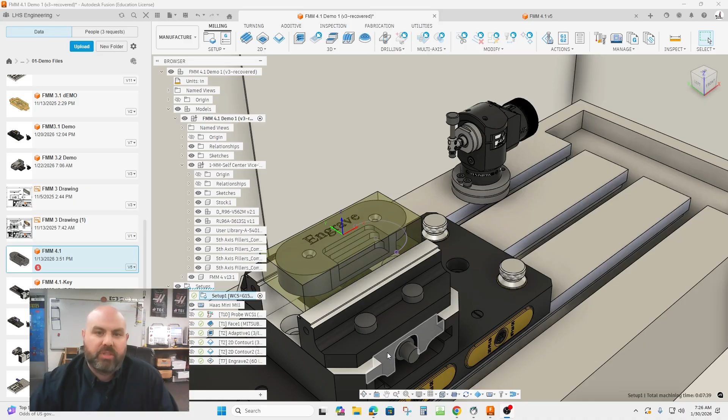Howdy. Today we're going to cover Fusion Manufacturing Milling number 4. It's this setup right here. A couple of key topics we're going to talk about is engraving, how we deal with this undercut by creating a sketch, and 3D adaptive clearing. So stick around, it's going to be superb.

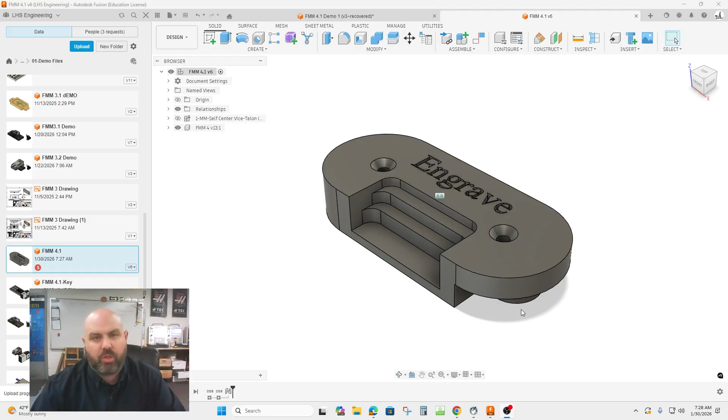Here's the part we're working with today. The couple of key features is it has this stair step, which lends us well to 3D adaptive, and we have this undercut. So we're going to learn how to basically create a sketch that we can use in manufacturing to control the cutter. Before we can do the manufacturing, we first need to address we have this undercut.

Eventually in the manufacturing process, we're going to do a finish contour. And the best option would be to finish contour around the bottom of the part here, all the way around, including this area here, that there is no line to follow. So we're going to go ahead and put that line in, so when we get to the manufacturing process, we can machine this perfectly.

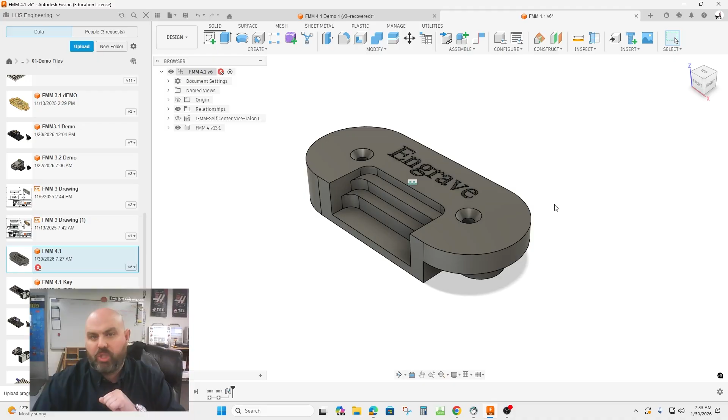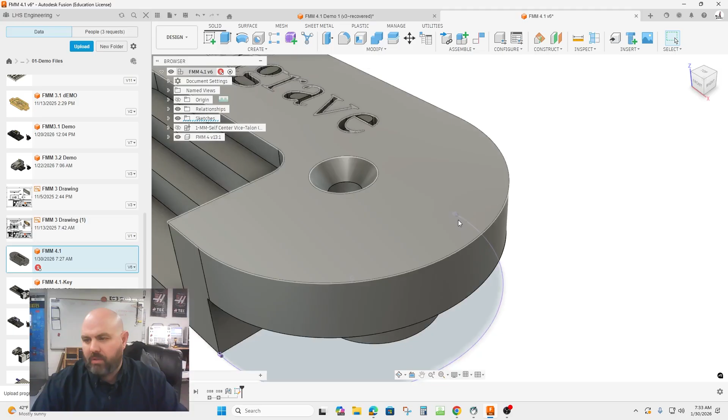So we're going to start a sketch on the bottom of this part. On the keyboard, P for project, we're going to click on this arc, and we're going to click on the little line here, and then there's one on the other side here, and we'll go ahead and click OK. Then we can flip this back over, hit Finish Sketch, and zoom out. That gives us this purple line here that we can use on our finished contour when we get to manufacturing.

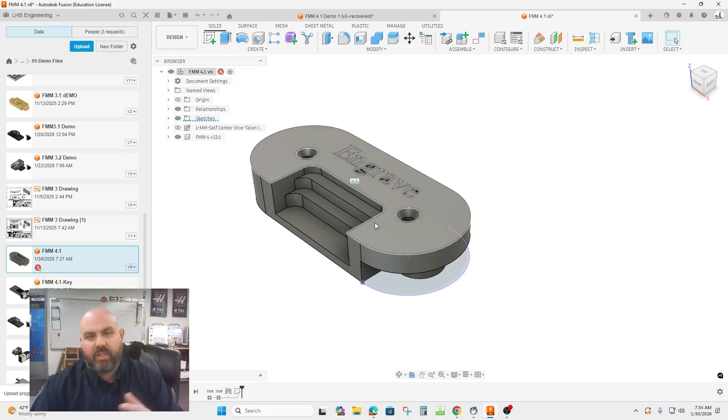Now that we've set the part up where we want it, we can go ahead and create our file where we have our work holding and the part loaded. We're going to use our setup sheets, which I have in the classroom, or you can download, that is going to walk you through the work holding, how big the stock is, what tools we're going to need, and the work offset. So go ahead and get that done and then come back to this video where I'm going to show you the new elements.

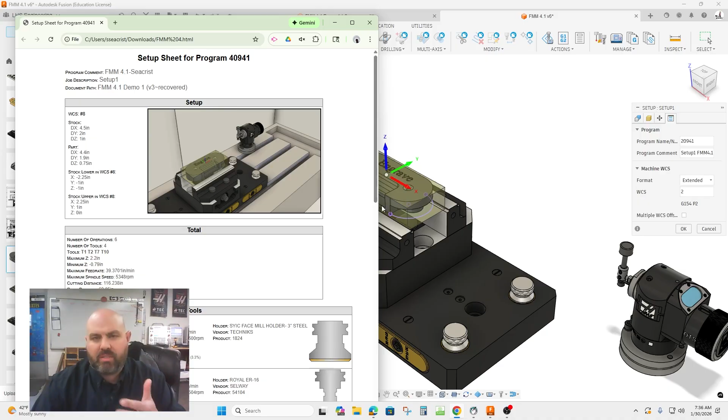And then the file name or the file number right here, and the name is this. Obviously you're going to use your last name. The rest of the setup tells you where the origin is, which you should know how to do from previous videos. So we're going to go ahead and move on that. First thing we're going to do, first 2 steps, are we're going to probe it and we're going to face it. So go ahead and do that and then come on back to the video.

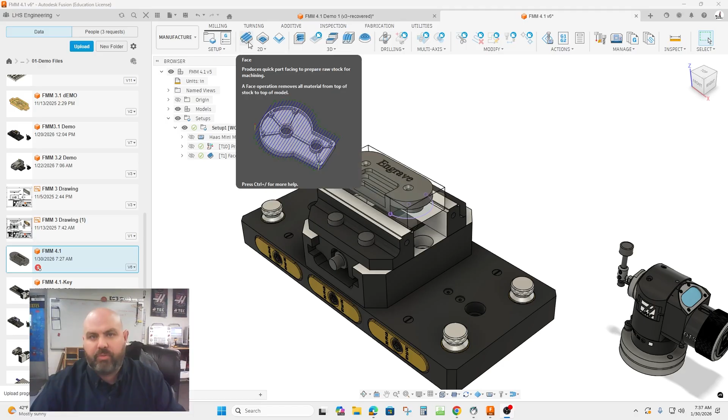Okay, welcome back. We have probing done and facing done. So now we are going to want to remove most of the material using adaptive. In the previous videos, I showed you how to use 2D adaptive, which would have some limited success on this part. Would we get the basic shape? Yes, but this stair step in here would require a 2D adaptive for each step.

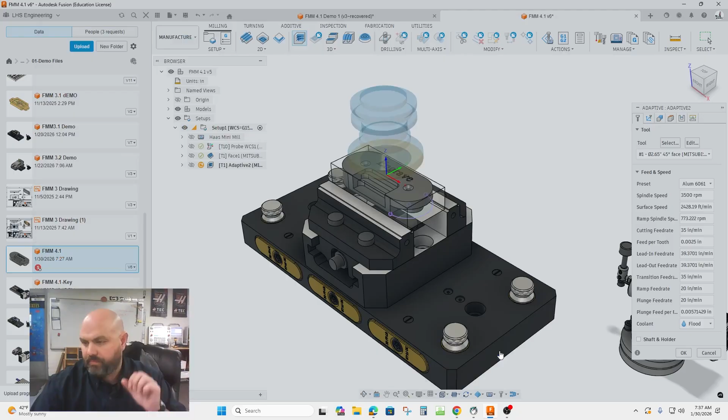So the better way is to actually use 3D adaptive. This will pick out all of the things. We're going to go ahead and select our tool, which should be our 3/8 end mill in aluminum. Then we're going to come across and it's going to pick up that we're cutting this, looking at any previous machining. Essentially all we have to do is check the optimal load—this is a little bit aggressive for a high school classroom, probably fine in production, but I am going to reduce it down a little bit so that we're a little bit easier on the machine, especially if you make a mistake. And then we're going to go ahead and click OK.

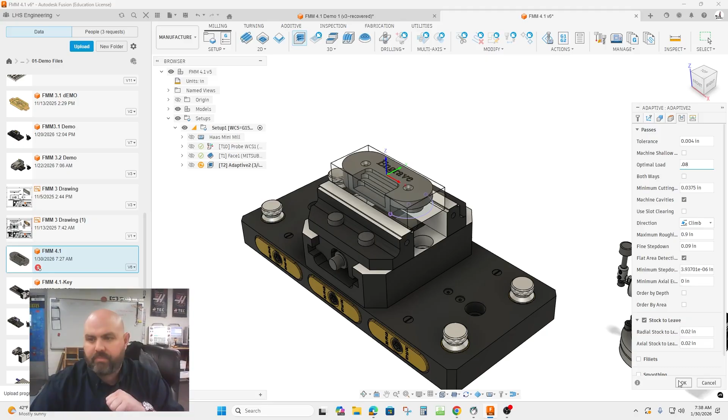What this is going to do is it's going to look at the part, and you're going to see that it is going to cut everything in one pass. So you can see that it's gone in here and removed all this stair step and roughed out the entire part.

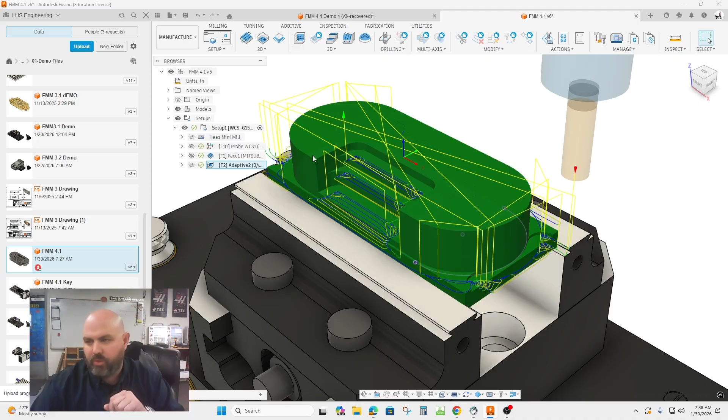The only thing I didn't do that I should have done is I normally like to push the part. Let's go in and turn off the model really quickly, or the stock really quickly, right here. We needed that turned on, by the way, for probing, if you wonder why it's on. But if you look here, here is the bottom of the part.

Well, this isn't a good side because this is the side without the thing. But if we grab here, the bottom of the part lines up with the bottom of this, and I don't want to do that.

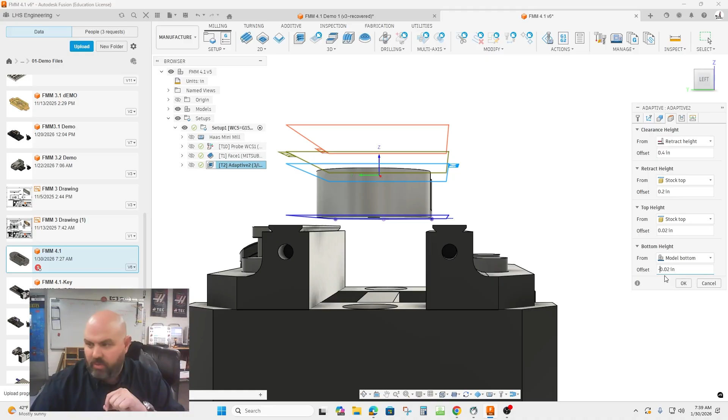So I'm going to come back in here and push the bottom. We're going to offset it the opposite of what they did, negative 0.02. If you look at the blue thing, you can see that blue line makes it a little bit below it. That makes sure when we flip it, we have a better finished part. I'm going to go ahead and click OK. It's going to do some more thinking, and it should take off to that level.

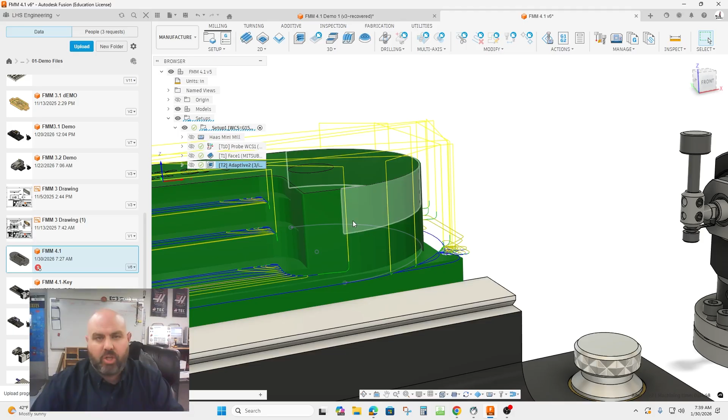So now that we've got most of the material removed from the part, our last step is to go in and finish it. As you can see here, there's a little bit of material left, so we're going to have a series of contours.

I'm going to go ahead and select contour. I'm using the same cutter, and I'm going to pick that purple line that I drew, and then this one, and that one, and that one. We are going to go ahead and click OK.

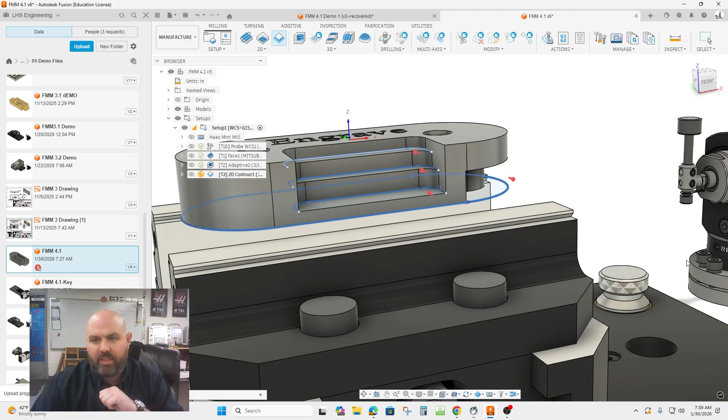If you watch it now, it should produce the finish depth as well as cut each one of these exactly to size. If we had not used 3D Adaptive, we would have had multiple 2D Adaptives—three to be precise: the outside, this step, and this step. We eliminated that down to only one, plus one contour to finish it.

Now the next thing we're going to do is drill and countersink. Countersinking you always want to do second if you can, because the countersink process is actually fairly hard on the cutter. If we already have the hole, it will be a little less hard on the cutter.

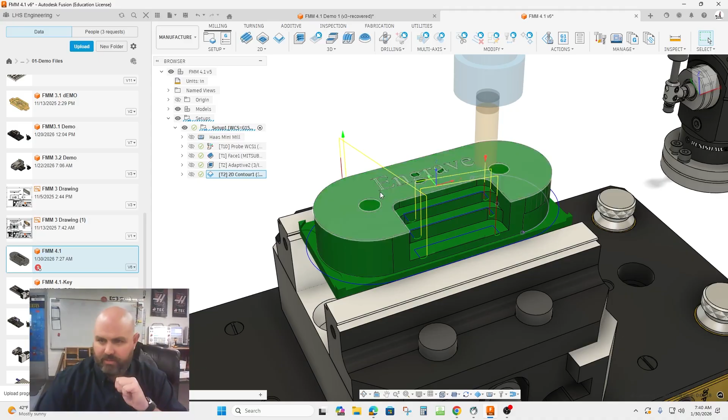So let's go ahead and drill, and we're going to select our drill bit from the tool. If you look at the print, which I provide, it's a number 7 drill bit, which happens to be tool number 8. We're going to select this, select same hole diameter here, and that will pick both of them. We want to break through the bottom, so tip through—I always add a little bit more—and go ahead and click.

Oh, we have one thing to check. The top height, notice the blue starts at the bottom of the countersink—it's assuming we did the countersink first, which we did not, we're drilling first. So what we need to do is switch this from top of hole to top of model.

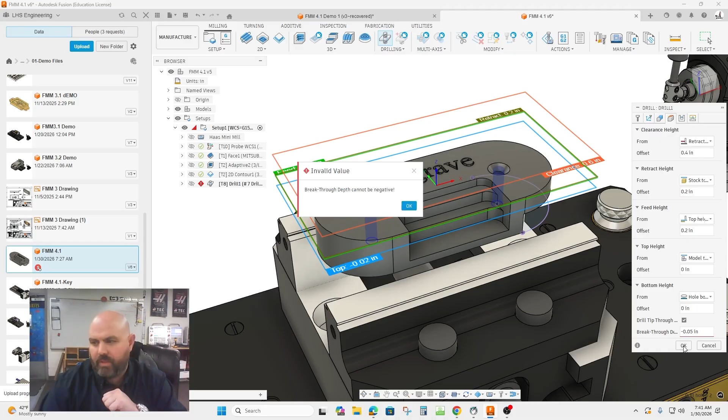Now it's extended up to the top of the model so it knows where to drill. Oh, we can't have a negative breakthrough—that's right, this is positive. Go ahead and click OK, and we should now have a hole that drills all the way through.

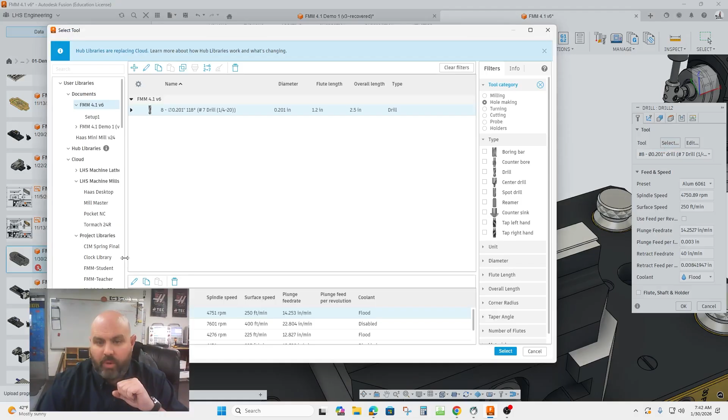Now we're going to come back and do the countersink—same process as drilling, but a different tool. We're going to use the countersink drill, which if we go back to the library, here it is, in aluminum. We hit select, then we're just going to select the geometry and click same geometry, and now we have both. We don't need to make any adjustments—we just click OK.

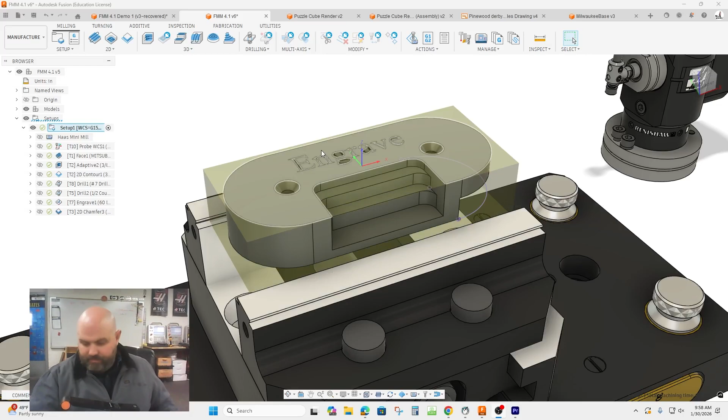Before we can do the engraving, we need to make the engraving bit. Here's our engraving bit. We're going to show you how to make this in Fusion and put it in your tool library. To add it to the tool library, we need to click on tool library.

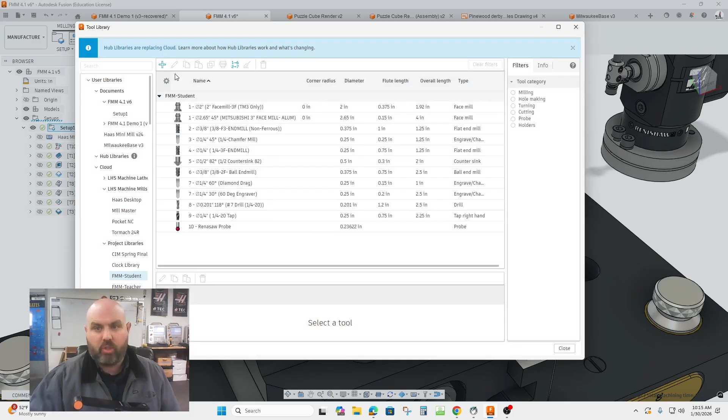There is already a cutter in here. I actually have two because I've demoed this once before and it didn't work, so I'm going to delete that one and create a new one. To create a new one, I'll click on the plus, and then we have to pick the style of cutter it is.

This is an engraver, so if we come over here it says engraver chamfer, and we click on that. Then we have to give it a title—so this is a quarter inch, quarter F1, 60-degree engraver. F1 means it's one flute. The vendor is PT Solutions.

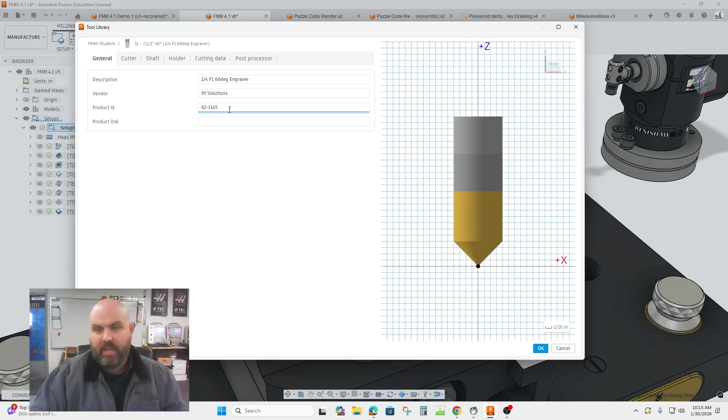The product number is written right on the box, which is where I'm getting this information: 62-1145. If I had a link to the website where I bought it from, I could put that in here, but I don't have it.

Coming across here, we have to collect this information from the box or from the cutter. So it is a chamfer mill, it is in inches, there is a single flute, and it is carbide.

Now, the diameter right on the box, the shank diameter, which is the same for both of these, is 0.25 and 0.25. Now, tip diameter is 0 because this is a true point cutter.

The overall length, I've taken it out of the box and measured it with my ruler, and it came out to 2.5 inches.

Now, the length below the holder. We need the holder right here, we need to know this length here. And if I measure it, it is 1.3, so I'm going to go ahead and put in 1.3.

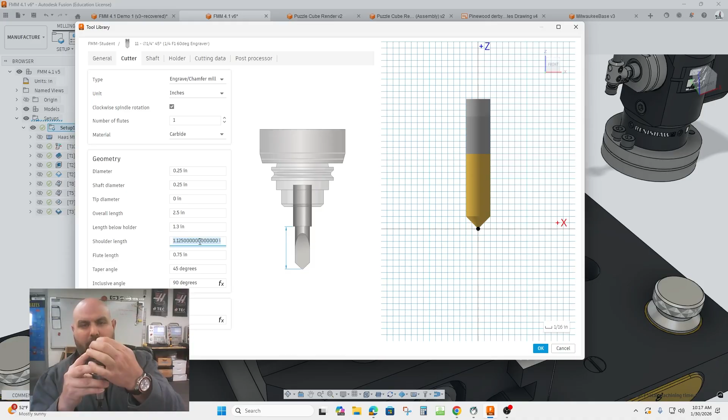The shoulder length is, if there was a shoulder, there is not. If it went from a smaller diameter to a bigger diameter, that would be the shoulder length. In our case, we're just going to make the shoulder length similar to the maximum amount it can cut, which is 0.25. Then it's going to err on me because the flute length has to be smaller or equal to the shoulder length, so I'm also going to make this one 0.25.

And you can see that's the gold part right here. I could do 30 degrees for the taper angle, but we know based on the box, the inclusive angle is 60 degrees, so I'm just going to come down here and put in 60.

That gives us pretty much what it can cut. Now, the gauge length, we don't need to worry about for now. We did not have a shaft for this cutter, it's held right in the tool holder. There's no extra shaft, so we're going to skip that.

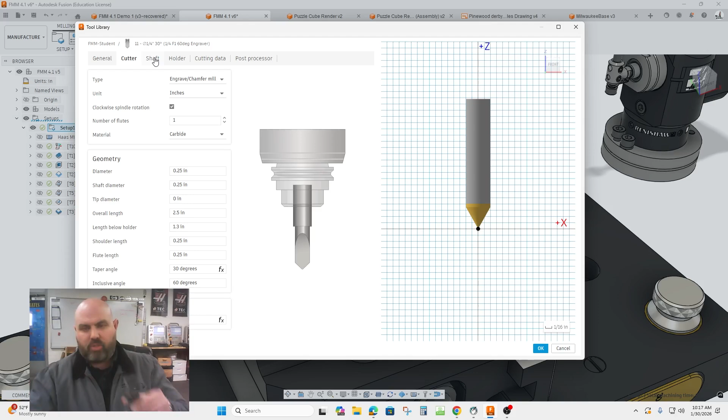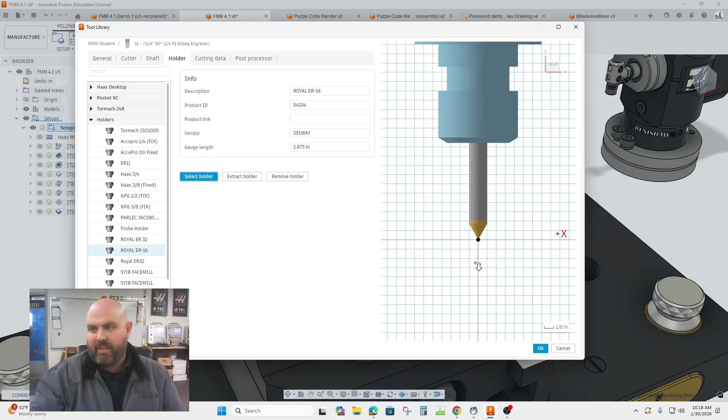The holder—now, you may need to get this tool library from me, it is all the holders. It should be on Schoology where you access all the other files. This holder is a Royal, says right on it, and this size is ER16. So if we come down here, we got a Royal ER16, we're going to click on that and hit select. And if we zoom out, you should see that somewhat matches this—they look the same.

Cutting data is our next big spot. We need to tell it how fast we are going to run this, in both RPMs and in feed rate.

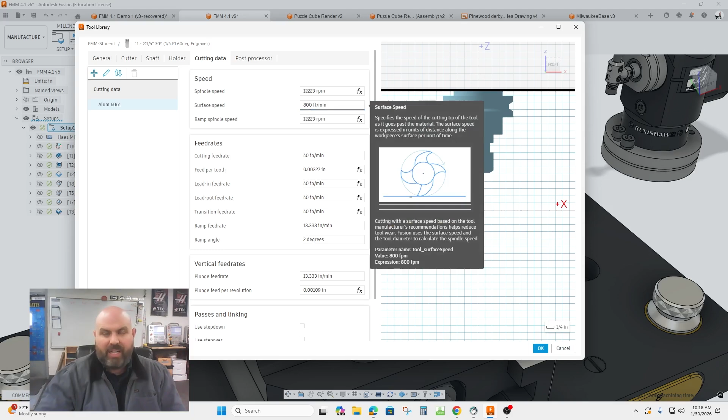So over here, we are going to first, under default, write aluminum, because that's the material, 60-61. Then for the speed, we're basically just going to fill in the surface speed. For aluminum, 800 to 2000 is the ideal surface speed, but if we put in even the minimum of 800, it already maxes out our machine. So what we're going to do is use our slowest machine that cuts aluminum, which is 6,500 RPMs—that's the Mini Mill 2. We're going to go ahead and default to set this to the maximum of our lowest machine.

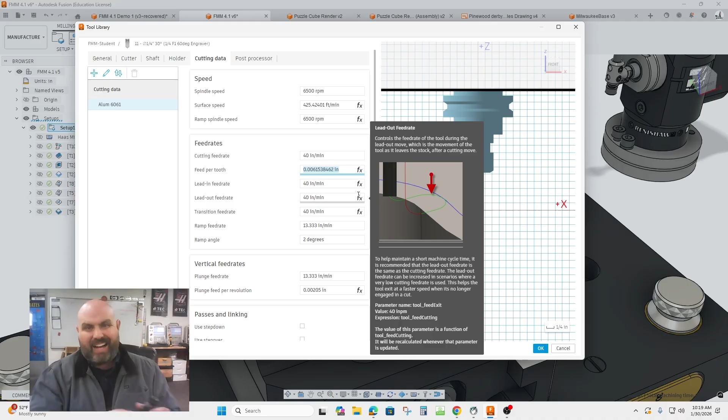And then we're going to come down here and adjust the feed per tooth. Because it's a pointy cutter, the weakness at the very end is high, so we're actually going to run it at a relatively slow speed. We're going to do 2,000ths per revolution, which gives us a feed rate of around 13 inches. Obviously, in production, that would be way too slow, but for our purposes in a high school setting, this is ideal.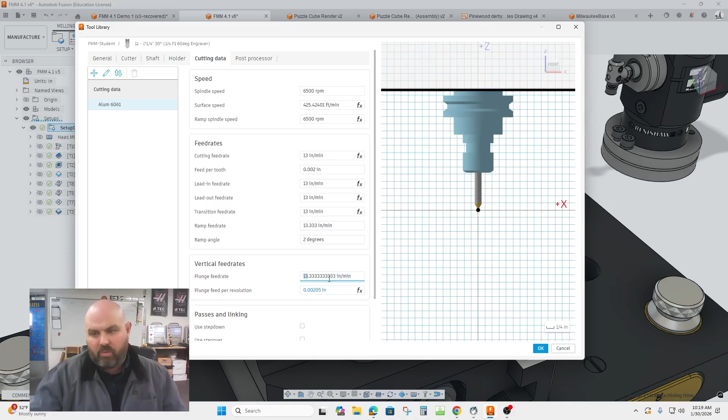All of these should be the same. I normally do the ramping speed the same, but the plunge rate I normally do half or thereabouts of whatever the feed rate is. So this is 13, and I'm just going to do 7, close enough to half.

The next stop is post-processor. This number has to match where we put it in the machine. Given that we run it in both the Mini Mill and the Mini Mill 2, and basically our engravers, whether it's a diamond drag or this one, are always in slot number 7.

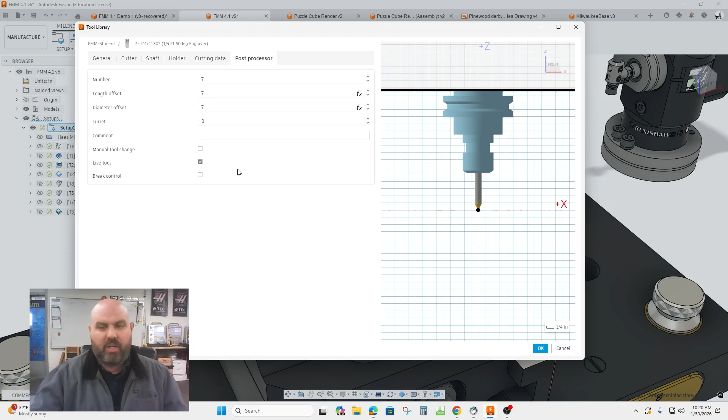We're just going to default this to slot number 7. Note, I may change this in the future, so if you're in my class, listen to whatever number I advertise, since sometimes I move the tools around to better fill the needs. But right now, we're doing it in slot number 7. We can go ahead and click OK, and now we have that cutter loaded right here, and we can use it to go do the engraving.

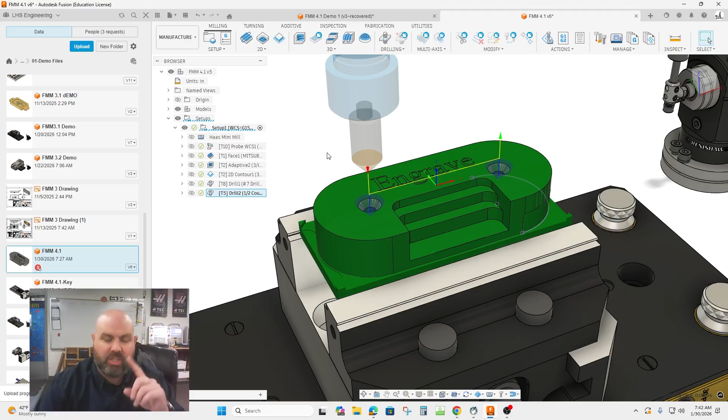Now, the last new thing we're going to talk about is how to do engraving. Engraving operates slightly differently than tracing, which we did in two previous assignments, both the keychain and FMM3. Notice the spacing between the letters. It's going to use the V of the cutter to go up and down so that the edge of the cutter matches the edge of the lettering. So it'll go deeper here, be shallow along here, and get deeper as it tries to move through those spaces. It's much more elegant.

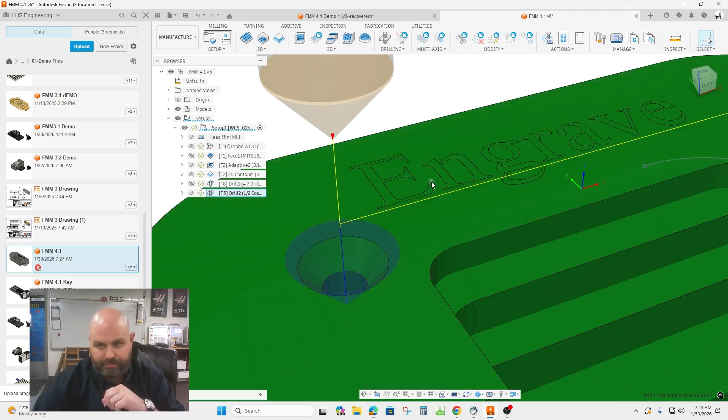It takes longer than tracing, and it's also harder on the cutter. If you're not careful with the lettering, you can very easily break the cutters because they're extremely weak.

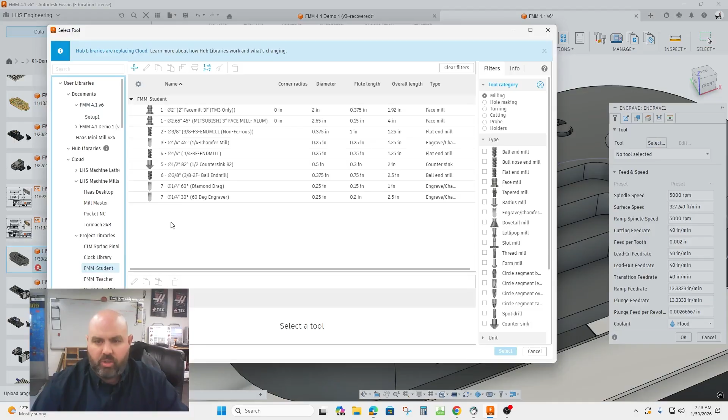So what we're going to do is go into 2D Engrave, and then we are going to select the tool, which should be in your tool library, students. It's number 7, but not the diamond drag — it's a 60-degree engraver. It has a 60-degree angle, and it's a single point cutter. You can see if you zoom in here, it's going to do that.

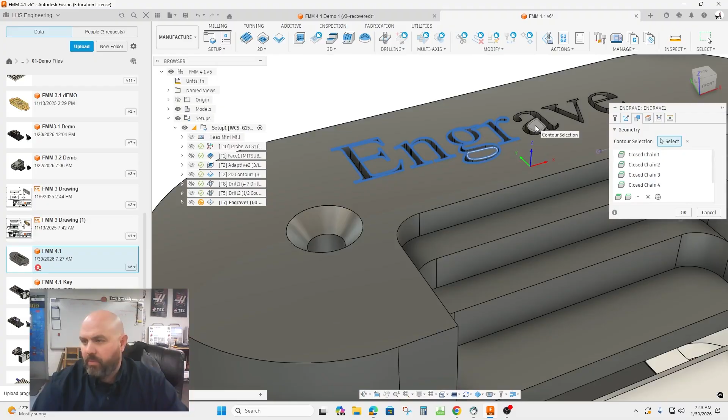Then you simply select the lettering. We're going to go around, making sure to select both sides of the G — that one down there is what I meant by both sides — and these letters here, and go ahead and click OK. What you'll notice is, if we zoom in, the cutter is shallower through this V and deeper through this V, and that will produce a perfect engraving.

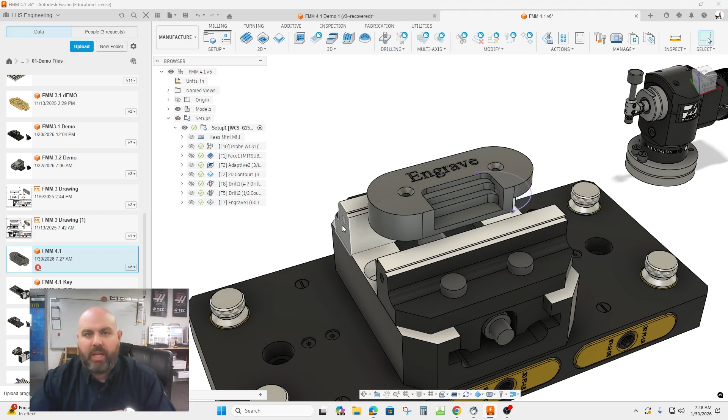Okay, our last step is we need to put a chamfer on this part. So we're going to go to 2D Chamfer, and select here, here, here, and here. We go back to the tool and make sure we select the chamfer tool, tool number 3, and make sure we select it in aluminum.

What we need to understand is we cannot chamfer all the way up to this wall. If we try to get all the way to the wall, getting all of this line, the chamfer cutter would have to go into the wall. So Fusion's smart enough that it will prevent you from hitting the wall. But we can get close by making adjustments within the parameters here.

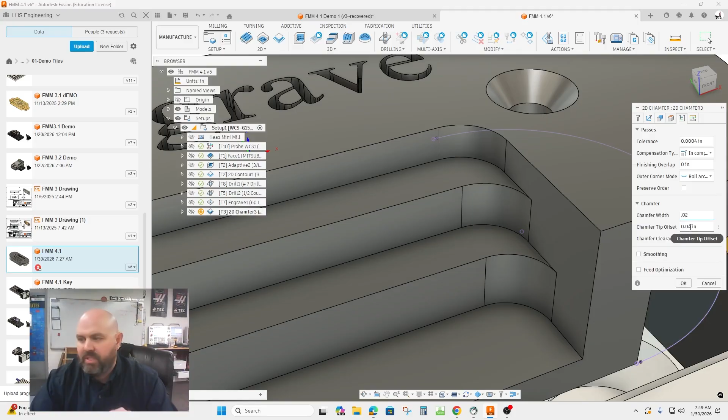So if we go to passes, our width is always 20 thousandths — that's how much chamfer we're doing. But the tip offset — if we use the tip and we're way down here at the very bottom, we can't get very close to the wall because the diameter of the cutter will hit before the tip finishes. But if we move it up, changing that tip offset so we're further away from the center line, we can get the cutter closer to the wall.

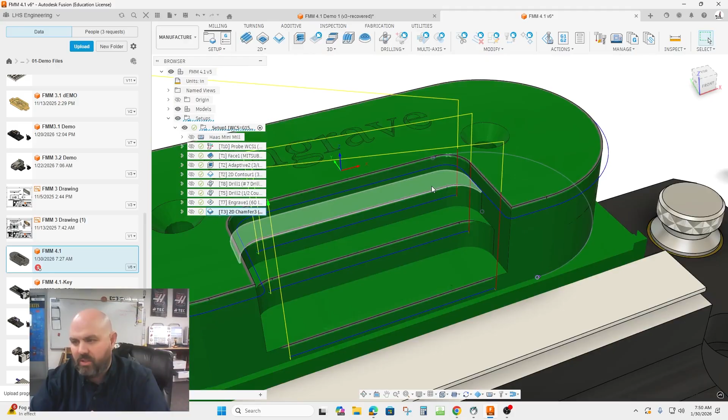So if I click OK right now, you'll see that it's going to produce a line. It doesn't even like these ones... oh, there it does. You can see how far it stops away from finishing this. Remember, we're never going to get all the way to the end.

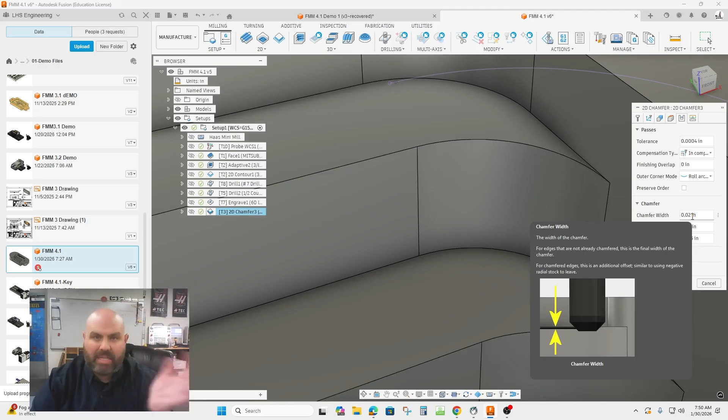But what we can do is right-click Edit, and we can adjust this tip offset. Now you have to do a little math in your head. It's a 1/4 inch cutter, so the diameter is 1/4 of an inch. What's half of that? 1/8 of an inch, or 0.125. So that's minus the width of our chamfer of 20 thousandths, so now we're at 0.105 — that's the maximum we could move it over. We're just going to move it over 0.1, not 1, 0.1, and then go ahead and click OK.

You're going to see that on this pass, it's getting far closer to the end of this line. It's still avoiding the wall by a very small amount, but it is getting us much more of the chamfer done than previously.